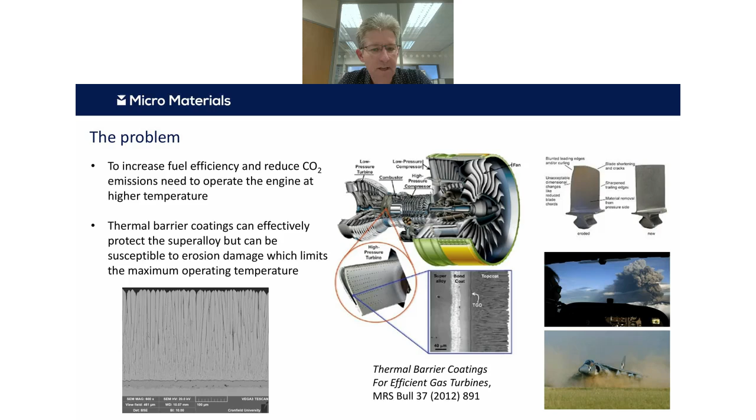temperatures. But the problem with that is that these increasingly high temperatures are causing issues with the thermal barrier coatings that are on the components of the turbine blades in the hot gas stream, which protect the superalloy in the turbine blades, and they are susceptible to erosive damage, which increases at these higher temperatures. So the challenge is, can we design multifunctional coatings that can combine thermal barrier properties with also enhanced erosion resistance?

So this is quite a challenge from a coating development point of view, because there's lots of compositions you could try and it's very expensive and time consuming to evaluate their properties. So what we really would like is to develop novel small-scale test methods that allow us to effectively evaluate and screen potentially useful compositions for further work.

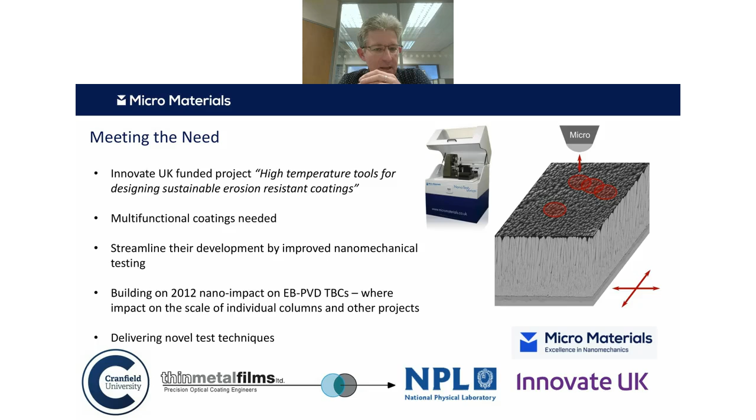So we set up with Cranfield University and Thin Metal Films and the National Physical Laboratory, Innovate UK funded projects, which was called High Temperature Tools for Designing Sustainable Erosion Resistant Coatings. I'm going to be talking today about some of the work that we've done within that project, and it builds on a previous study with Cranfield University where we've shown how we can use our nanoscale impact test technique to look at these thermal barrier coatings.

So I'll start off by introducing what I mean by our standard nano impact test technique. Then I'll move on to our new random impact test and show how we've developed it. And we started off looking at

reference model systems, bulk materials, and we use that to understand and develop the test technique and understand how the process of the impacts developed and the crack networks develop impact by impact. And then I'll move on to looking at the thermal barrier coatings for the turbine blades.

And we're going to look at two particular systems. I'll talk in detail about those in a moment. And these are yttria stabilized zirconia, and gadolinium zirconate. And I'll start off just by looking at standard impact tests, where we look at repetitive tests at the same location and show what information we can get from that.

As well as SEM, we can do some focused ion beam milling to look at the subsurface damage, and we can see how well the impact test correlates with the actual erosion behavior. And we can also look at things like the effective impact angle and also the comparison between these two different thermal barrier coatings.

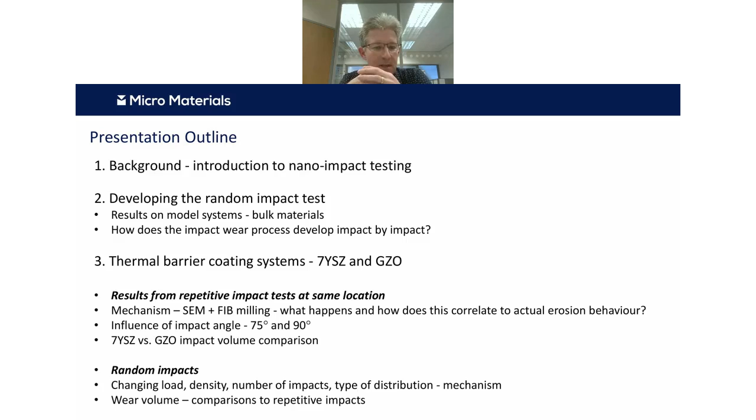So the two thermal barrier systems that we're going to look at today are the E-beam PVD yttria stabilized zirconia system, 7YSZ, and that essentially is a ceramic top coat with a thinner bond coat, on either Mar-M 247 or sapphire substrates, and a similar thickness gadolinium zirconate system, which in this case is effectively a bi-layer system with a gadolinium zirconate top layer and then a 7YSZ sublayer, and again the same bond layer and similar substrates.

So you can see from these images that these coatings have a very interesting microstructure, with a very columnar structure. They both have some porosity, both within the columns and between the columns, and this adds to their strain tolerance. It's one of the reasons why these E-beam coatings are used in these demanding conditions in the engine.

So the nano impact test technique, there are two different ways we can run this test. We can run single or multiple impacts. If I start off just talking about a single impact test, we typically have a test technique where we pull our test probe away from the surface and then we rapidly accelerate it to create this high strain rate impact, as shown schematically on the bottom left there. And then as it hits the surface, the test probe bounces and eventually comes to rest. And this happens in a small number of milliseconds.

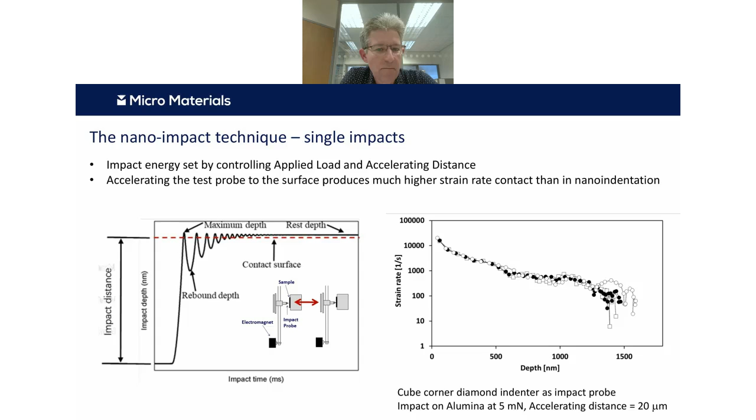All of the subsequent bounces are elastic typically, so all of the damage is done during that first bounce. And you can see on the right there is an illustration with a cube corner probe hitting a bulk alumina sample. You generate these very, very high strain rates compared to a normal quasi-static nano-indentation test where the strain rate might be something like 0.1 per second. So we're many, many orders of magnitude higher than that. That gives us more relevant information for these high strain rate contacts that happen in the real world.

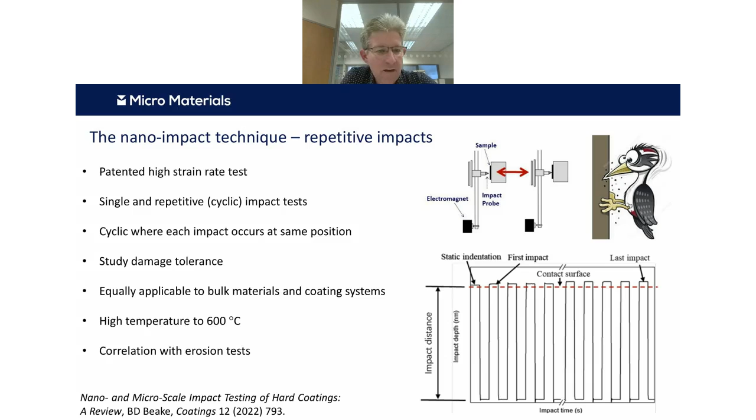So instead of these single impacts, we can repeat that process. Now, instead of milliseconds, we're combining repetitive tests, typically, as I say, at the same position. And then effectively we've got a surface fatigue test. This allows us to look at the number of cycles to failure and really start to understand the damage tolerance of these typically coating systems, but also bulk materials. We can run these tests at room temperature, or at high temperature as well. And in practice, they correlate very well with erosion tests.

So here's just a typical example of the sort of data that you might get off one of these repetitive tests at the same position. This is actually taken from one of the tests with the cube corner indenter on the alumina sample that I showed the high strain rate from a couple of slides back. Here we can see penetration depth into the material on the y-axis and time on the x-axis. It's one impact every 4 seconds in this particular test. So we can see we have this very small depth right at the beginning of the test due to the static contact.

Then the first impact creates a larger depth, something like 600 nanometers, because the dynamic force is much higher than the static force. And then there's this very gradually increasing probe depth over the next about 10 impacts. And then suddenly there's a big change in depth. In this case, this corresponds to material removal, so the cracking and material removal in the system.

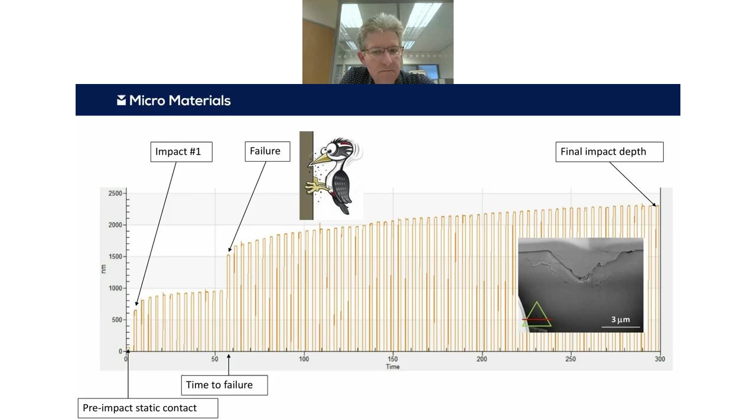So if you have, for example, an acoustic emission sensor, which is actually done in this work, we're not showing it, you can actually get a distinct peak in the acoustic emission just at that particular impact corresponding to that cracking. And then you can use focused ion beam again to look and see these crack networks that form subsurface. So again, as I say, it's a very powerful test technique for looking at fatigue and fracture.

So one of the nice things is it's done within our NanoTest system, so it has all of the control that we can set for normal indentation and scratch tests, and we can set up these automated arrays or matrices of measurements. We can do multiple tests, set everything up together at different forces and different numbers of repeats at different positions. That allows us to build up a statistical picture of the surface fatigue behavior of typically coating systems, and generate something like an SN curve, but from a single sample. So this is really a very useful test technique.

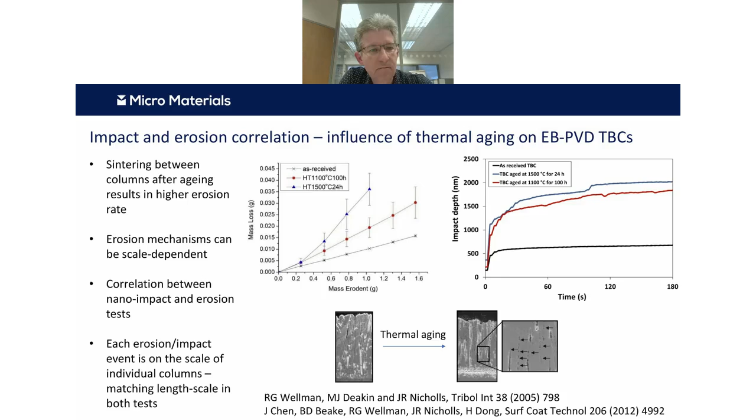So this is some work we've done more recently, in collaboration with Thomas, who's now at MMU, and Sam, who you've just heard from in the introduction. Here we were looking at whether we could use the test technique to correlate with sand erosion for diamond-like carbon coating systems that were deposited on a hardened tool steel substrate. So in this case, there are 3 different coating systems. They're all around 3 or 4 microns thick.

And just an illustrative result there on the left, where we can see these 3 different coating systems. The tungsten-doped diamond-like carbon coating system is much more fatigue resistant, so it leads to a lower final depth, whereas the other 2 coating systems, called A and B there, the undoped and the silicon-doped DLC, are less impact resistant. There's a transition in failure mechanism, if you like, after about 12 or 13 impacts in those 2 cases. There's also a transition where the silicon-doped one starts off not quite the worst, but ends up being the worst. So it switches over in relative ranking against the hydrogenated undoped DLC.

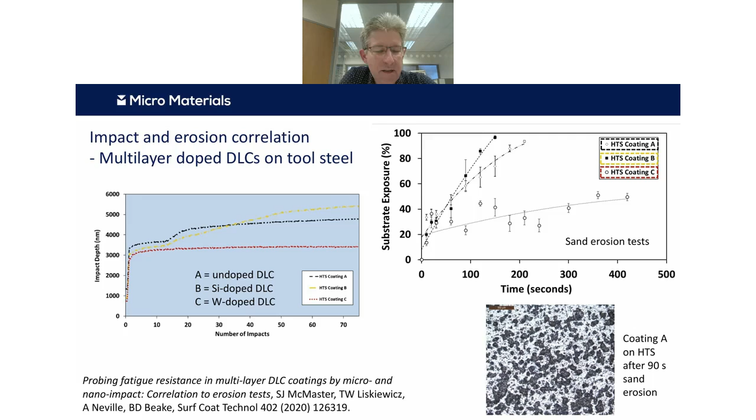So if you look on the bottom right there, you can see an image of a surface after one of these tests, which has about half of the substrate removed. And you can see it's not a particularly even erosion scar. So this pattern of impacts and erosions, they're happening fairly randomly over the surface. So this sort of thing gave us an idea that we might want to see if we could simulate that by designing a different type of impact test.

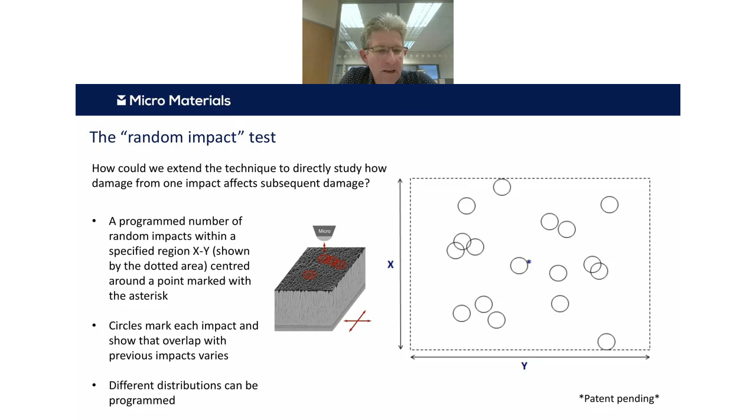So we've achieved that by, in software, generating a programmable number of random impacts within a specified region, any region that we like, and we can choose how many impacts we want. We can choose what type of distribution of impacts within that region, whether they can be totally even probability of any position, or whether we want a sort of Gaussian distribution where the probability is more likely nearer the center of that. So we have complete flexibility, and this allows us then to look at these impact processes a little bit more accurately.

So as I said, we used bulk materials as part of the development of this. So these are non-coatings. So we picked typically two different glasses, BK7 glass and fused silica glass. These are both smooth, homogeneous, transparent, and they also have broadly similar fracture toughness as well. And what you can see there is a couple of examples. There's an optical and an SEM image of some cracks on the borosilicate glass. And you can immediately see for this material some of these cracks between subsequent adjacent impacts, essentially. So these crack networks are starting to build up.

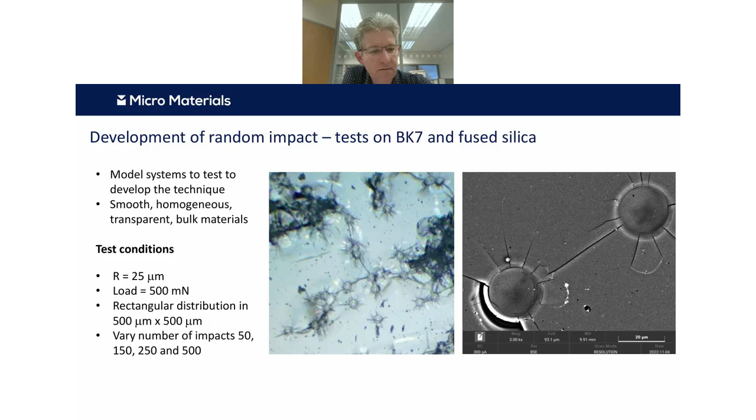So we studied this by changing the number of impacts between 50 and 500. So if we look to start with, I don't know how well you can see that, but on the fused silica, we have 50 impacts randomly within this half a millimeter by half a millimeter area. There's not much overlap, but as we increase the number of impacts, then there's more probability of these impacts being closer together, and this causes essentially damage between them. And you can see progressively as it builds up, and you're starting to get a transition to a more extreme mechanism by 500. So that's on fused silica.

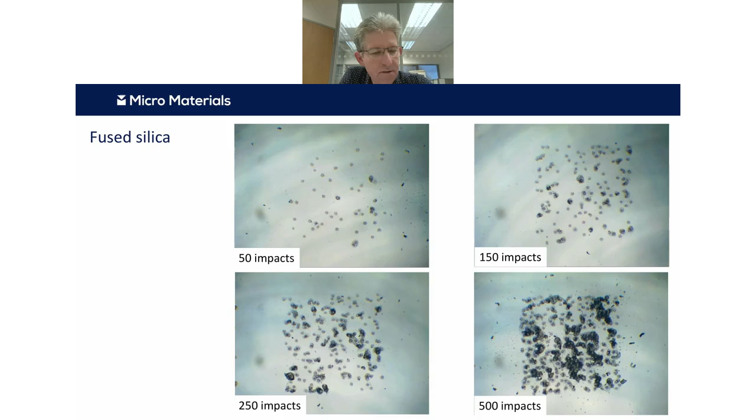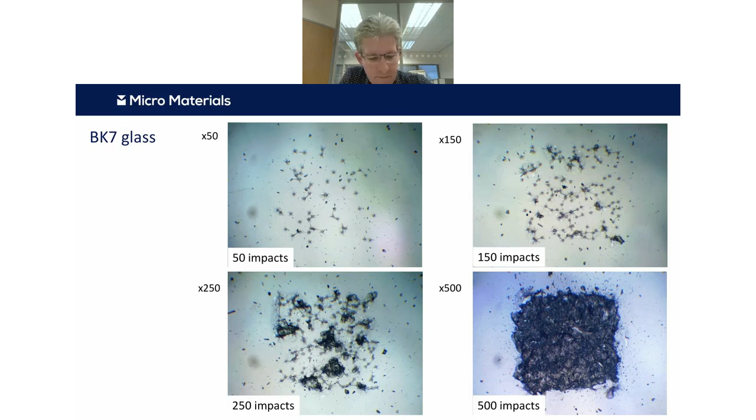Something more dramatic happens when you look at the BK7 glass, and you can see here, even from 50 impacts, we're starting to get networks of cracks already forming between some of the adjacent impacts. And as we run this test on with more impacts, these networks are starting to build up, and these are leading to rather dramatic removal. And at the end of the test, we've just completely destroyed the sample. So this is quite a nice result, because this actually correlates with what you see in the literature for erosion resistance, that despite the fracture toughness, BK7 does have a worse erosion resistance. And although the size of the impacts in both cases are about the same, the crack morphology is really quite different.

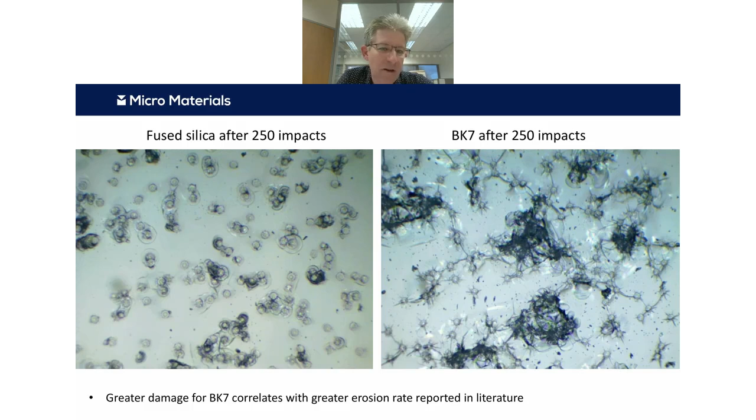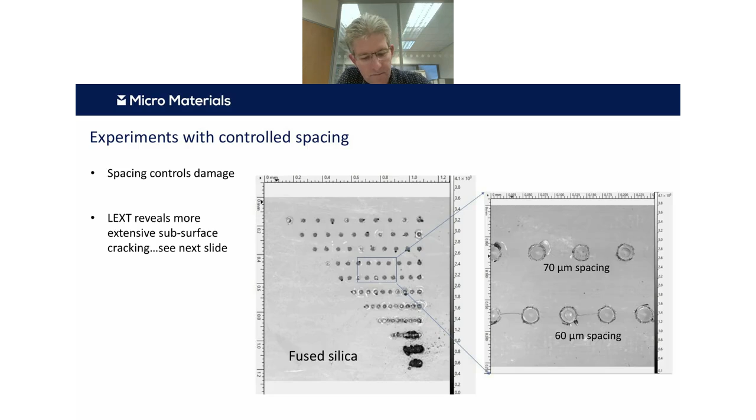And we're starting to get, by 60 microns apart, a few of these cracks joining up. So this is the contrast image. We're also at NPL, where they were looking at the green light images, and that reveals a little bit more about what's going on.

So here you can see in the middle at the top, there's actually a lot more going on in these systems subsurface, and you can see these curved and straight lines between these impacts that you're not seeing at the surface. One of the nice things you can do, because these samples are optically transparent, is look through the samples, and the LEXT imaging allows you to rotate them and build up this pattern of what's going on subsurface.

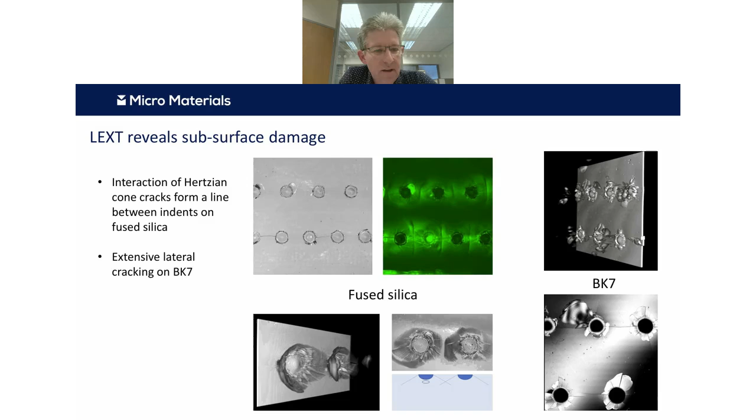And you can see that what appears to be happening is this interaction of these Hertzian cone cracks that forms these apparent lines that you see subsurface. In contrast, there's extensive lateral cracking on the BK7 glass.

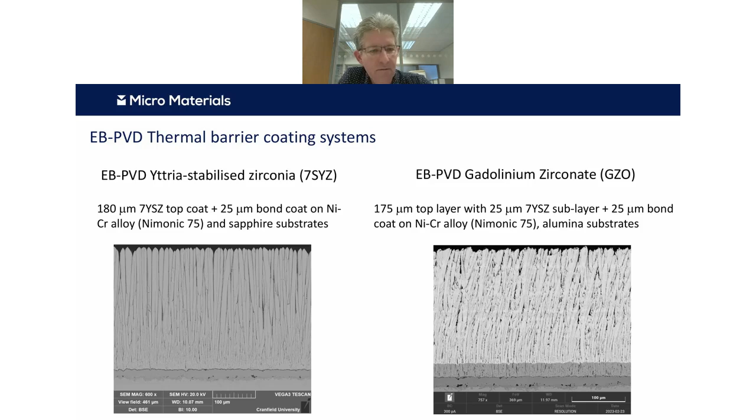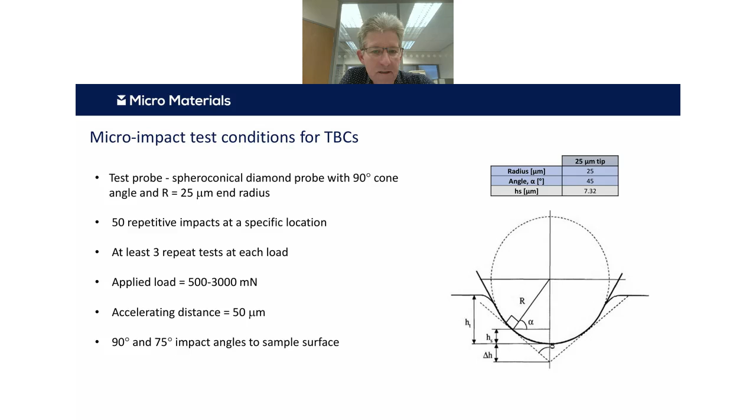Then we did some micro impact tests on these two different coatings with, in this case, 50 impacts at the same location, repeated 3 times over a range of different test loads, accelerating over 50 microns. We did these tests at 2 different impact angles. The spherical probe has the geometry shown on the right: a 25 micron end radius going into a 90-degree cone angle. There's a transition between the spherical part and the conical part after about 7 microns penetration. So when looking at these test data, it's better to think of these as sphericonical probes rather than spherical probes if the impact depth is greater than that.

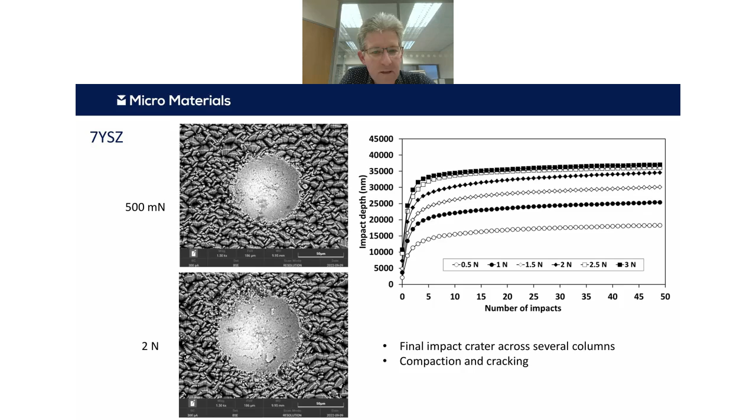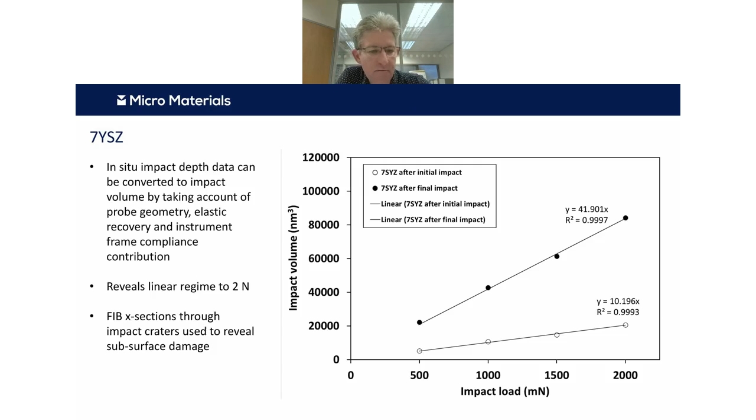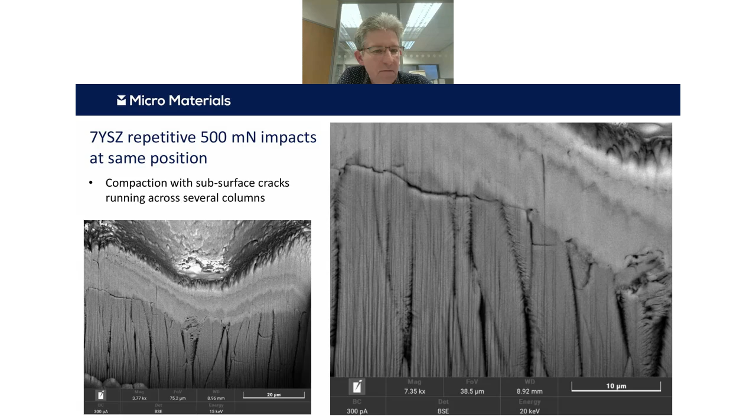The next step was to look at focused ion beam cross sections through these craters to see the subsurface damage and how that compares with erosion. This is an example of one of the impact craters at the lowest load we looked at, which is 500 millinewtons. We can immediately see a compaction zone in the center of the crater, and just below that compacted area there's a lot of cracking going across these columns, in some cases being stopped or deflected by the columns. This is one of the things leading to material removal.

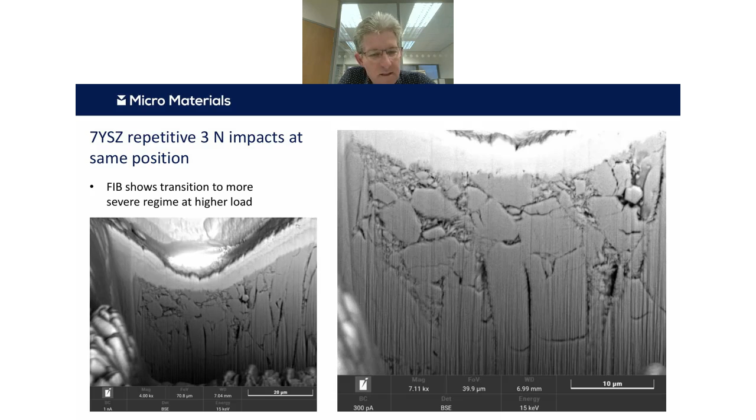If we now look at higher force, in this case the same test but with a force of 3 newtons instead of 500 millinewtons, we can see a much more extensive crack network. The columnar structure is really being broken up, transitioning into a much finer scale microstructure and material removal.

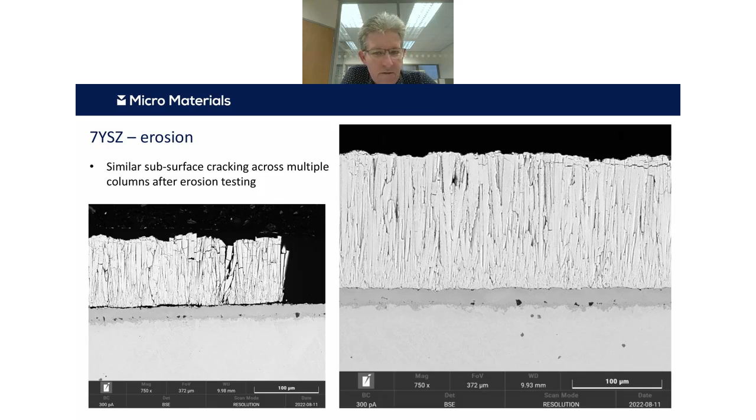And what's interesting is if you look at erosion scars, you can see similar cracking across columns, as you can see on the right. Also, if you're quite near the center of the scar, you can get some more extreme cracking and loss of the structure, as seen on the left. So very similar crack patterns that you see in both types of test.

And when we perform the same tests on the gadolinium zirconate, what we can see here is instead of the smooth curves that we saw on the yttria-stabilized zirconia, we're seeing much more jagged curves in many cases, as you can see on the right. What appears to be happening is that material is falling down from the sides of the crater into the impact crater during the test, and that's what's causing that. In the micrographs on the left, you can see a couple of examples, at 500 millinewtons and at 1500 millinewtons, where the craters either have debris within them or not. So there's a lot of variability, and this therefore leads to more variable impact volume data as well.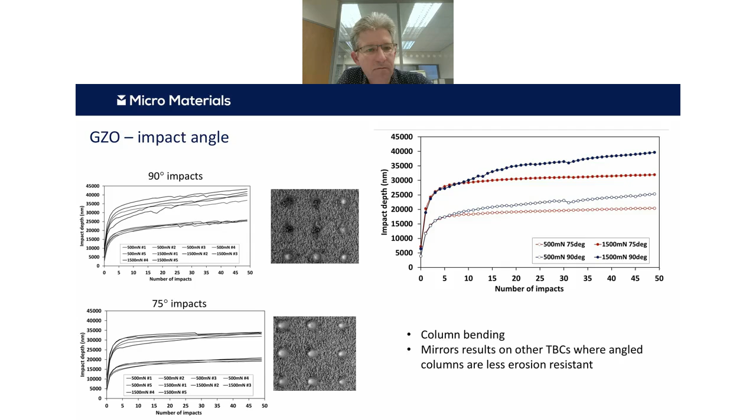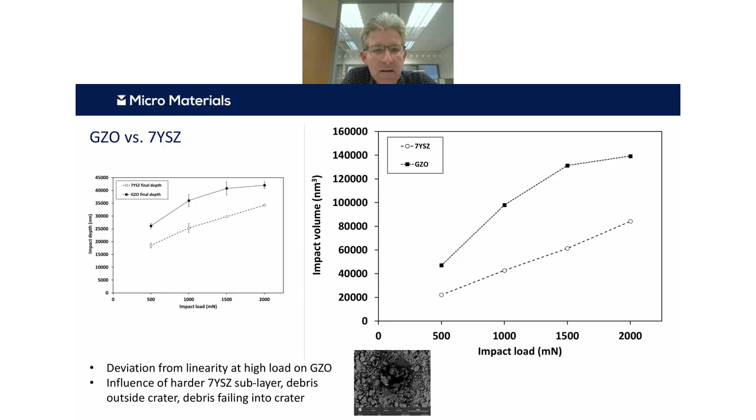And again, we can take the final depth data and convert it to impact volume, and then directly get a measure of the relative difference in erosion resistance between these two different materials in our type of test. Again, the 7YSZ system is linear. The GZO system is linear up until certainly 1 Newton, and maybe at a higher load. Some of this complexity is due to the debris falling into the crater, or damage actually taking place outside the crater, and even potentially the sublayer. There are several reasons why that system might deviate at a high load.

But nevertheless, it's quite encouraging that there's a very clear difference across the entire load range there. So I finish off with the random impact tests. We can generate these rectangular distributions, as you see on the right, where we have an equal probability of an impact being anywhere within the test region that we set. In this case, it's 1 millimeter by 1 millimeter.

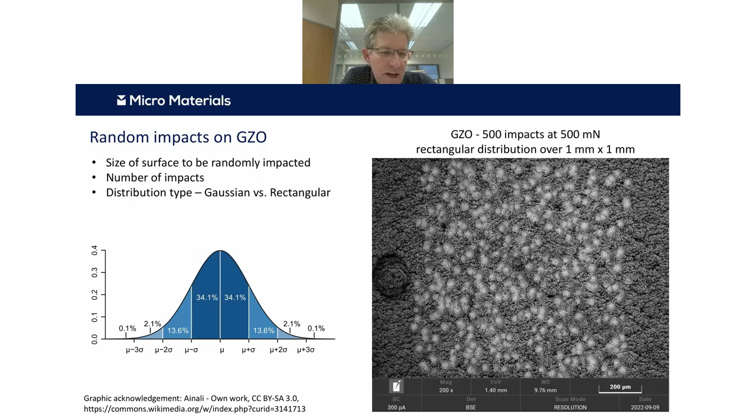Or we could go for a different type of distribution, like a normal distribution, where there's a higher probability of those impacts being near the center of the test region, which can simulate certain types of erosion tests more accurately.

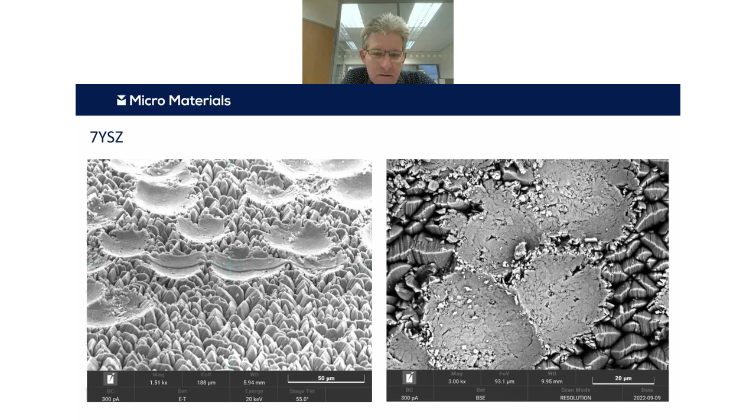So if we look at the sort of damage that we get in these random impact tests, now we can see a couple of different images there. You can see that we're getting the same sort of compaction that we see in the repetitive single impact tests, and also that cracking is occurring between these impacts when they start to be too close to each other, essentially. So if we compare the two coating systems by eye, they look reasonably similar.

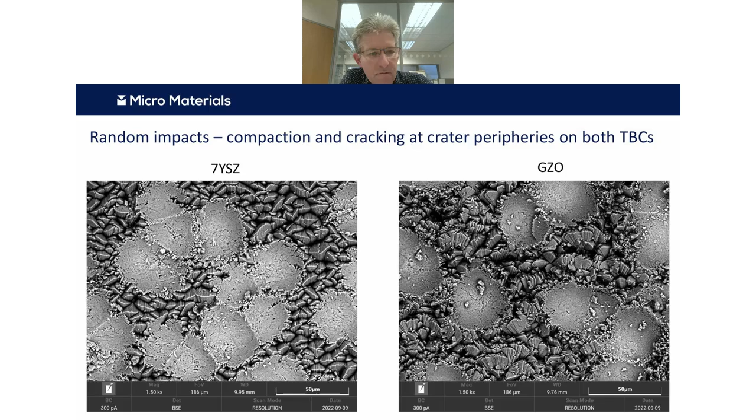Just at the beginning of the test, you can see these things. They look quite similar. The same sort of mechanism occurring in both cases. What's interesting, though, is if we increase the severity of the test by either doing more impacts, or in this case to do the same number of impacts but over a smaller region. So in this case, I'm contrasting 500 impacts either over 1 millimeter by 1 millimeter or 0.5 millimetre by 0.5 millimetre, or 1/4 millimetre by 1/4 millimetre.

And there we see really quite a dramatic evolution of the impact process, where this sort of columnar structure is completely broken up by these impacts. And so you're going from, on the left, you're seeing that columnar structure between the impacts, and in the middle it's starting to be broken up into much smaller pieces, and then on the right you're getting really this sort of filigree type structure. And you end up with a few of these compacted impacts in the end, but most of the original impacts are now being covered up by the debris. And that's not an entirely uncommon situation for an erosion scar, where essentially you're just seeing the result of the last few impacts.

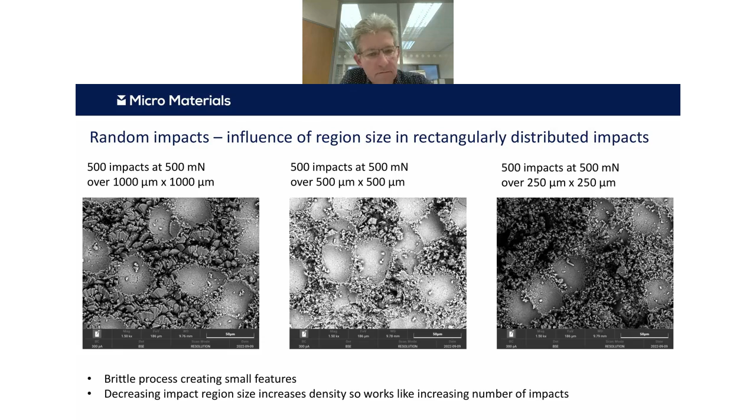If we perform all those impacts more closely together, then we're seeing essentially a much larger volume of material is removed. So it was in this case about 2 to 1. If we increase the force, however, then we're getting failure in both cases, and we don't see the same correlation. So it's quite easy to get statistical information there. You can run these tests quite quickly. They don't take very long, and then you can use your laser scanning to get a quantitative erosion metric for each coating that you're looking at.

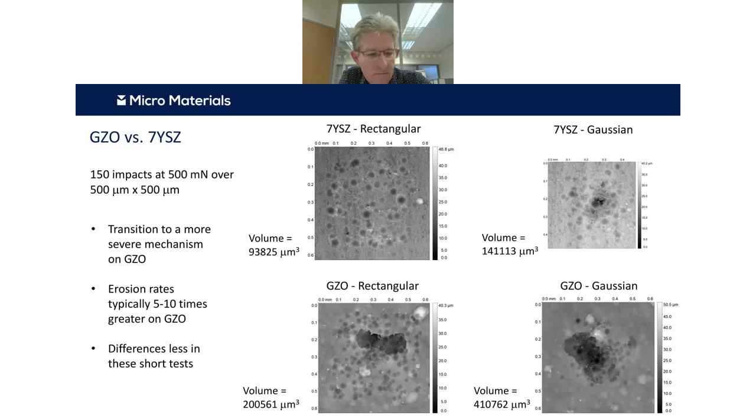So to sum up, hopefully I've given you a reasonable amount of information about our new test technique and some of the areas that we've applied it to so far. It's been very successful in that. And we're able to clearly show for all the materials we looked at that the impact density influenced the rate of impact wear or erosion, and effectively that the number of impacts and their spacing and distribution type were all interrelated. So that they all correlate together to give you an overall wear rate.

For the two TBCs that we looked at, we were able to see initial compaction followed by these developing fracture processes, the formation of this fine scale debris followed by these large area brittle fractures. And so that's hopefully going to be very useful information as we go further in the project to try and look at more novel coating compositions that have different microstructures where we're able to design in more erosion resistance.

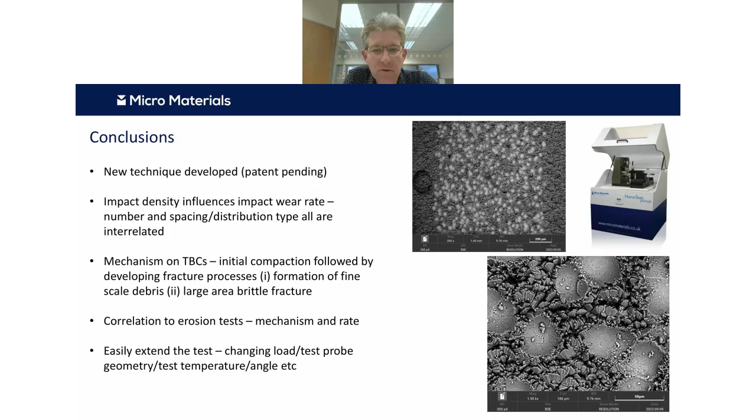It was nice that we're able to show quite nice correlation between the mechanism and the rate of the actual erosion tests. And I should say, although I've presented some results, it's also very easy to extend the tests by changing the load or test probe geometry, changing impact angle, and indeed changing test temperature as well. So it's a very flexible test technique. It's all possible within our impact module in the NanoTest Vantage system, shown there on the right.

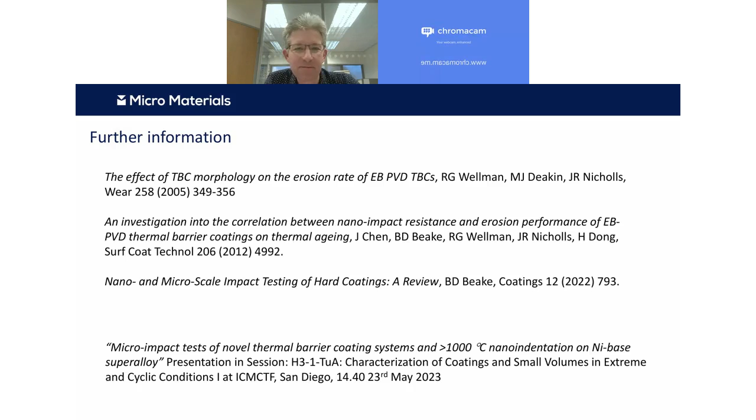Thank you, Sam. Sam escaped. He's back. Yep, just reloading my video stream. There we go. Thanks, Ben.

That was a fascinating talk. It was great to see, from when I did some erosion testing and correlating with impact, this next evolution, on to actually being able to mimic more of the proper erosion tests with this randomized distribution. So really, really great to see.